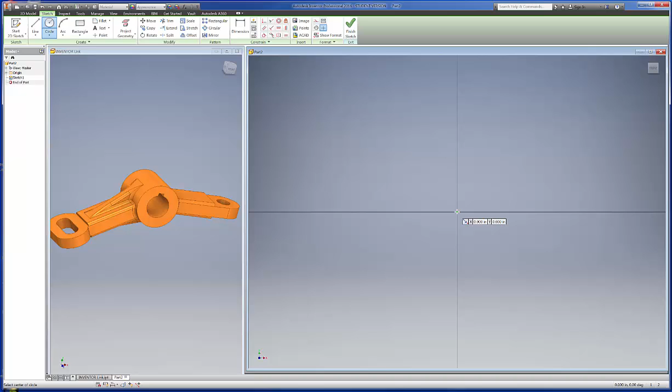Okay, this will be the first video of the link part that's shown here on the left hand side. So to start this, what I would start with is this cylindrical shape right here. So I would just go in and start a sketch, and I'd probably start that on the front plane as well, and simply draw a circle. Again, make sure it locks in on that origin.

Right click, do a general dimension, and the diameter of that is 2 inches, and I'll zoom that back out. That's all I need for that, so I'll finish the sketch and extrude that back. And again, I'm going to go back, and I want that to be 2 inches wide, and that's all there is about that.

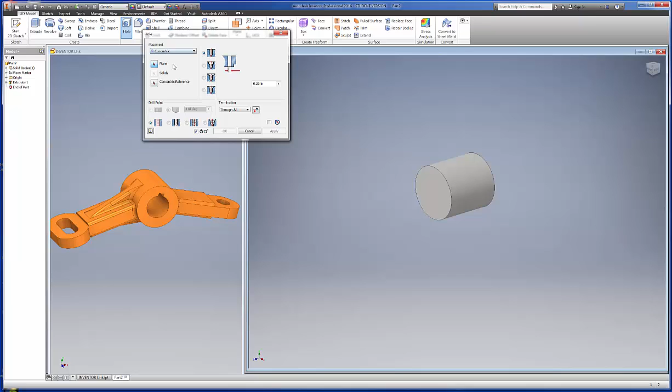Now then, we'll go ahead and put a hole in there here. It's concentric. I want to go concentric to this cylindrical shape. The hole diameter is 1.0625. It is through the whole part, and I'll just say OK, and that's taken care of.

Then I want to cut out this keyway. Now to do that, I'm going to create a 2D sketch on that front face again. Make it a little bigger. And then what I would suggest is just drawing a rectangle. And I'll draw that out here. I don't want it to be constrained by anything at this point, and I'll put some dimensions on it.

Now I want this piece right here to be 1/8 of an inch. And it says in the drawing that this is 1/8 by 1/4. So that means I want this to be 1/4. It's 1/8 by 1/4 keyway. And let's see, then we want to go from the center point to this first edge. We want that to be 0.125. That's half of that 1/4, so it's centered.

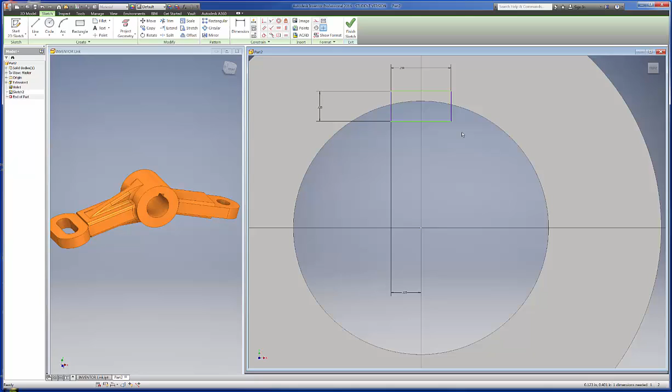And then finally what I want to do, and this is the only trick to this, is I want to constrain with a coincident this point right here and that arc, because I need to have 1/8 of an inch in this part cut out, and then I would have 1/8 of an inch in the shaft that's cut out here that goes in this hole, and then that would allow for a 1/4 by 1/4 square piece of key to make sure that this link turns with some kind of a shaft. So that's the only trick to that.

So that's all constrained, so I would just go ahead and finish the sketch, and I would extrude. And this time I want to cut, I don't want to join. So it's looking for different profiles, and the reason for that is because I've got this circular piece here that I forgot to make a construction line. So actually I'm going to go back and right click on that sketch and edit that, and there you can see it. So I'm going to take that circle and make it a construction and finish the sketch.

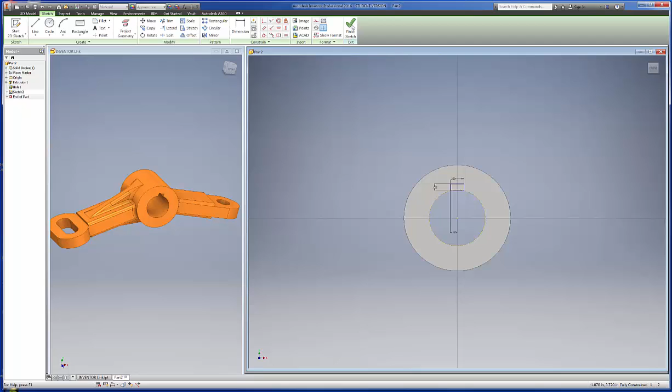And now I'll go back and do my extrude, and notice it automatically picks that. And again, I want to cut, and I don't want a distance, I want to go through all. And if I use the through all, if this thing would happen to get deeper or smaller, I would still be covered as far as the cut on that keyway.

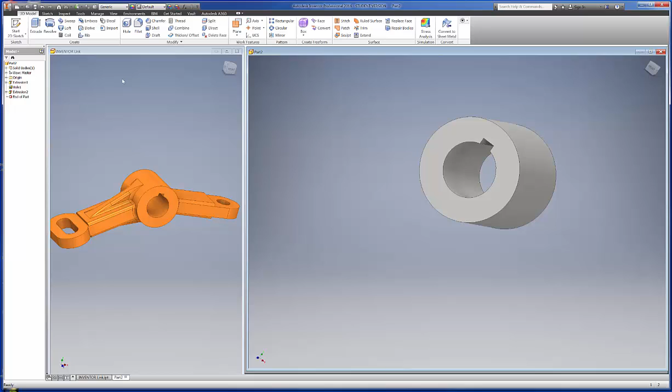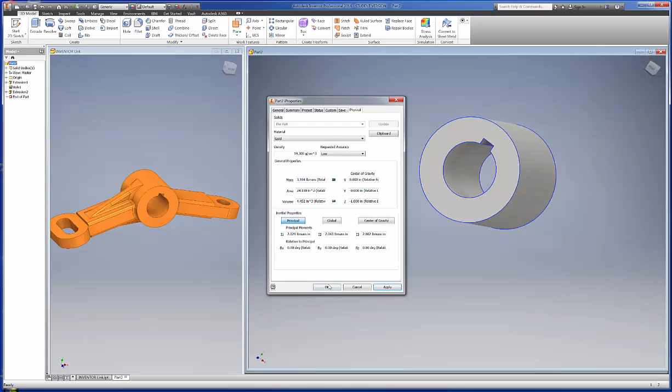So there's my keyway all cut out, and I can go in there and change the property on this, and let's go to physical here once, and then change that. I don't know what we want on this one. I think, like I said, I used some kind of gold on this piece earlier probably, so if I could find something that would, there's your gold. So it looks like that.

Okay, and then I probably ought to save this. There is the link. I'm going to say video. Okay, so I got that all taken care of. Now what I want to do is probably I could concentrate on two different things. I guess let's concentrate on this one over here. I did this a little different in the original, but let's just concentrate on this piece

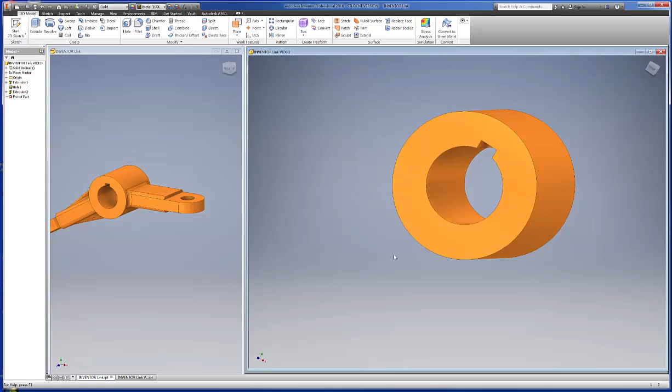right here. Okay, so what I want to do on that is note I need to find the correct plane to start with, and it should be the XY or XZ. I'll use that to create a sketch.

Okay, I'll go in there and draw rectangles on this. The key here is it needs to be between the outside edge and the inside edge of that hole so that it'll fill in the whole thing.

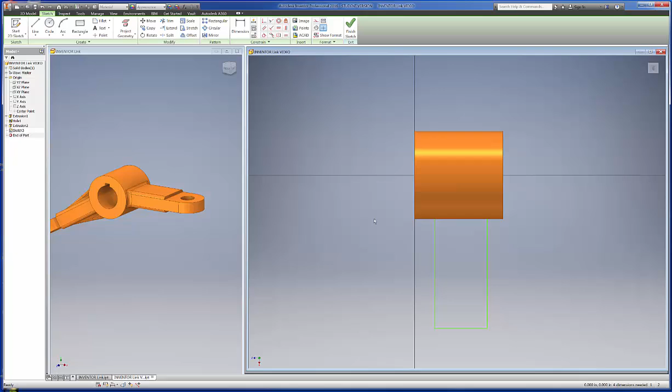So I'm going to go up to view and change this to wireframe so I can see what's going on there. Then personally I like to create a constraint, but before I do that, I need to make some edges.

So I'm going to go back to the sketch and project geometry. I want to project this line, and I think that it might do it. We'll see. Now I'll go back in there and create a constraint of collinear between this line and that line. Okay, and that is safe to do.

Then I want to go from the dimension. Let's go from this edge, right? Actually, the center point - I'm having trouble getting that center point. So maybe what I'll do is, because the dimension does come from the center point to where I want to be... I could actually come from this edge, but I really don't want to do that.

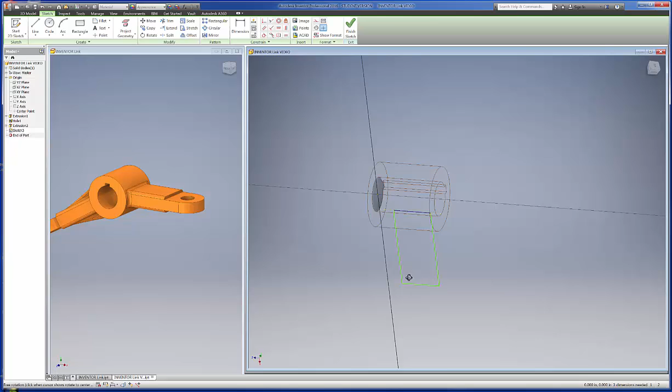And by the way, I'm going to make this edge construction. So what I probably ought to do on this is go ahead and create an axis. I'll go back to the 3D model. Well, I guess while I'm on the sketch I can't do that.

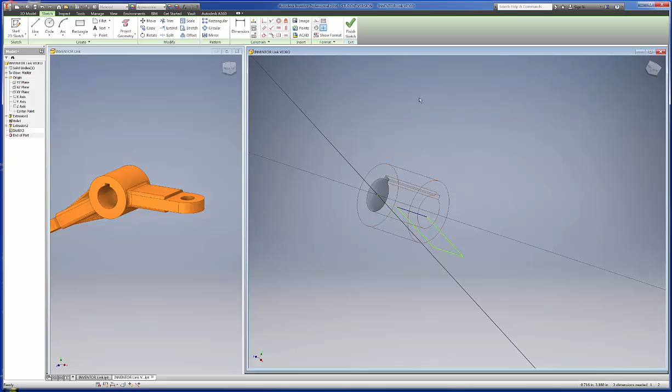Interesting. Well, let's go back to sketch then, and we'll create a line if that's how it wants to be. Let's go back and go to the same view there. So I'll create a construction line.

From the origin here out this way, and it can be as long or as short as you want. And then I'll turn the construction back off. So it did that as a construction line.

So I'll go from this line out to this line, and according to the drawing that should be 3 5/8 - again, 3 plus 5 divided by 8 if you choose.

Okay, then we've got to go from this edge to this edge, and that should be the overall thickness, that 1.5, and the overall thickness of the other piece is 2 inches, so it should be 1.5 from 2 is half divided by 2 is 1/4.

Then we'll give this dimension here 1.5, and you can see now that that thing is fully constrained. However, since I put a dimension from this edge, I'm going to have to make that a construction edge.

Okay, well that takes care of that, but ultimately what I want to do here is draw a circle on that as well, in that circular feature. So I could do this several different ways, but I'm going to go in there and draw a circle.

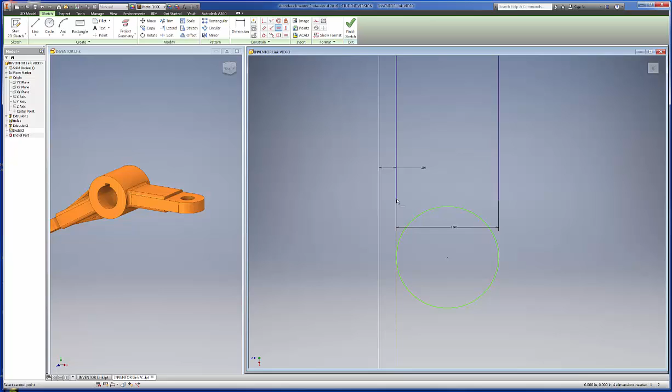If I can grab them. Let's see, so we'll do horizontal, and then that may end up having to be vertical, I think is what's happening there. Yeah, that's what I've got to go vertical there, because of the orientation. Notice my X is going the other direction, so I need to have this, and that line was trying to tell me that. Okay, and I lost my 3.625 inch dimension, so I'm gonna have to get that dimension back.

So boom, and I could go to this center point if you want, and I believe that 3.625 wasn't it? 3 5/8, I think. Yeah. And notice that's all fully out. It says it needs 2 dimensions still. But what I need to do then is trim this out.

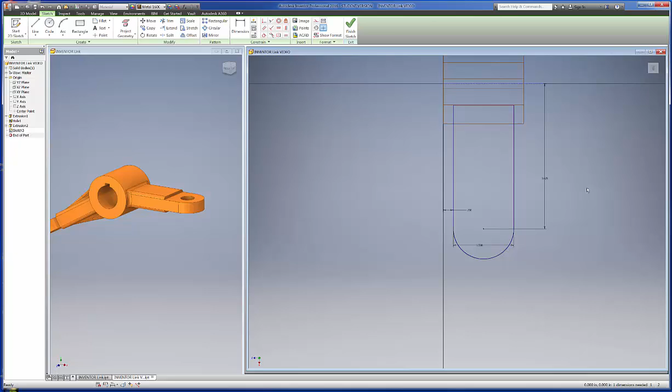And it's still saying I need 1 dimension. I don't see what I would need. Let's check and see. Nothing moves there. Nothing moves there. Nothing there. This doesn't change. And that doesn't change. So I don't see where we need 1 more dimension. Oh, okay. Yes, I do.

This line right here will move, I bet. No, it's this length right here that moves. So you really don't need that dimension. So you can finish the dimension or finish the sketch.

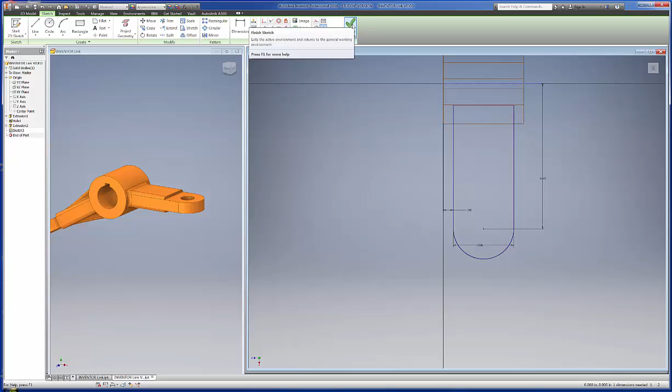And then we'll just go ahead and extrude. Now this time we want to go both directions, or both ways, so we'll go with the mid plane. We're going to go the same amount on each one. This would take it 2 different directions, or 2 different amounts. We only need the 1 amount, and the thickness on that is 3/4 of an inch.

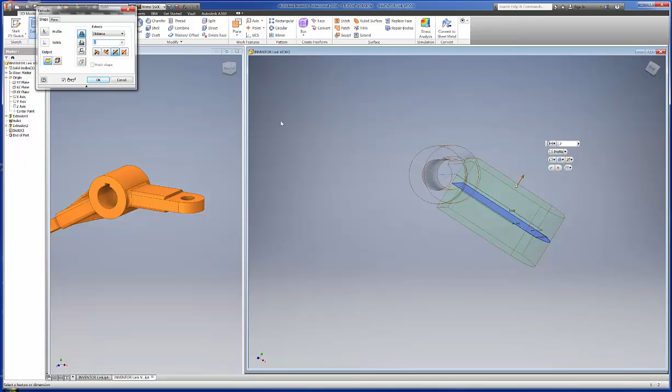Okay, and now we'll go back and get our view back to shaded. So there's all that. So we'll hit the save button. Make sure we save that.

Well, then we've got to cut this end down here to 1/2 inch thickness. So what I would suggest on that is create another sketch plane on this face, maybe, and I'll draw a rectangle. Again, I'm not real critical about where I'm going to put that.

What I'll do is I'll go collinear. I want this line and this line and that line. And then I want to go tangent, this and that. Now notice it's created all these yellow lines and arcs. I'm going to make those all construction so they don't confuse the issue.

And then it doesn't really give a dimension, but I'm sure thinking that this line has to be back from the center 3/4 of an inch. So you could dimension it like that if you wish. That would make it the same amount as going the other direction. So, I don't see it, so that's what I would have to surmise that it is.

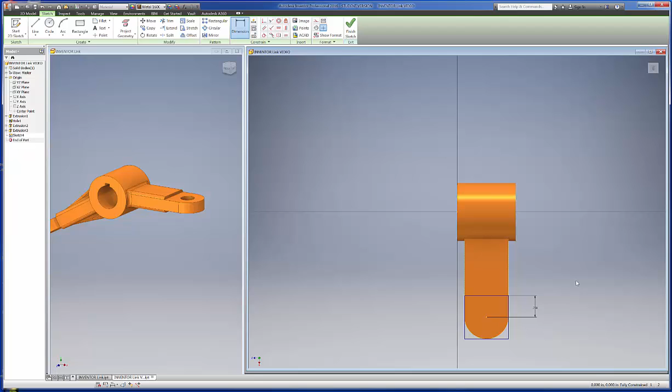So I'm finished with that, so I will finish the sketch and extrude. But again, I want to do a cut this time. But I only want to cut, if it's 3/4 of an inch, it needs to go down to 1/2 inch. That means that the difference between those two is 1/4. So I need 1/8 of an inch cut out of there. Of course, I'm going to hit save.

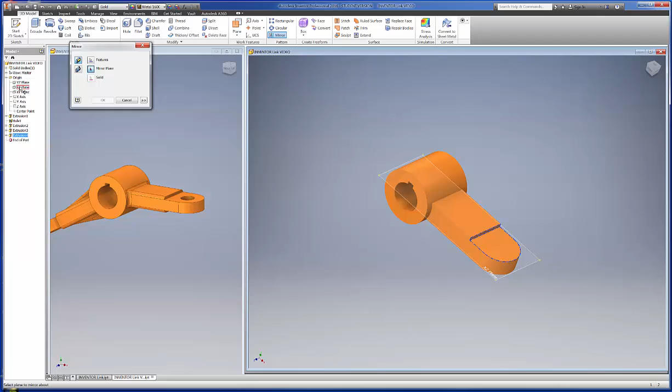Now then, what I would suggest you do is do a mirror. And the features to mirror would be this extrusion right here. And the mirror plane is going to be your XZ plane. And that's right through the middle. That's the nice thing about the way we did this one. If we wanted to do mid plane, and you cut that out, and of course hit save.

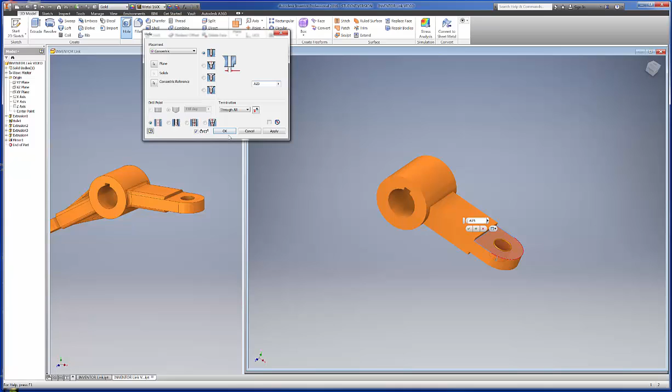Then finally what we would do is punch that hole through there. So punch a hole and we'd go concentric off of this face, and then we'd want to go off of that edge, and that's not quite 1 inch and 1/8, is it? It looks like it's about 5/8. It's .625, and it is through all. We'll hit OK. So that's how I would do the first portion of that.

So we'll stop the video here and create another one for the other features there. And we still have to put some.

Let's go ahead and put the radii in there. So we got fillets, and it doesn't call those out, so I guess we're going to have to go with the 1/8 of an inch like we did on the last ones. So we'll just go in there. I personally like to pick around these corners first, and that makes that blend a really nice, easy blend.

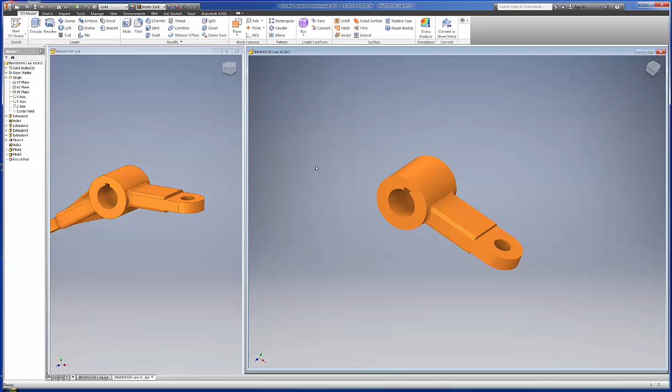And I'll hit apply, but I don't like to do them all at once. But then I'll hit this one, and that'll give me the fillets that I need on this particular section of the part. So again, I'll hit save, and that'll be off of this one.